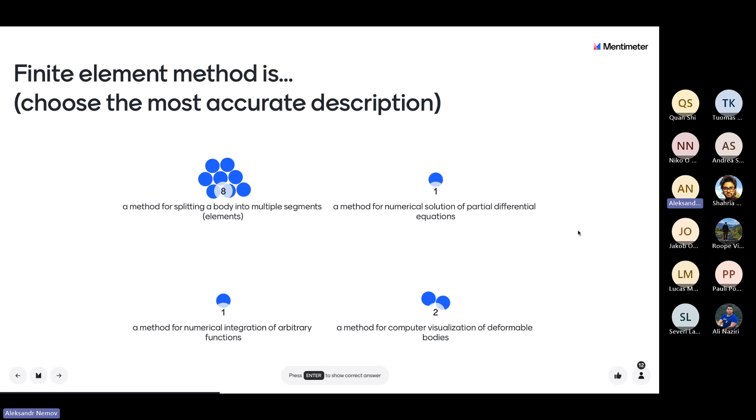So let's discuss. The majority of responses received this method of splitting a body into multiple segments, which are called elements. And I cannot say that it's completely wrong. I will show you the right response, in my opinion, but please take it easy, because I don't imply that it's completely wrong.

That's what I started to say, that it is included in the finite element method. So it's a part of the method, but I would not call it the most accurate description, because it's not about geometry, how to split a body. It's just one part of this method, pretty much a preliminary part, how you prepare. But what the method does itself, it allows you to solve some problems.

So just by splitting a body into segments, you don't really solve any problems. But what you do solve, when you want to find a solution for a problem, you are dealing with partial differential equations, right, as we discussed during the previous class. A lot of things in continuum mechanics can be described using partial differential equations - a lot of them.

And this is one of the most commonly used methods for solving those problems. I will later show that we don't usually solve the partial differential equation directly in finite element method, but that's a little bit later.

So other visualization - yes, it's also always used, like you want to see what is your mesh, what is your discretization, and then you want to see the results, some post-processing things.

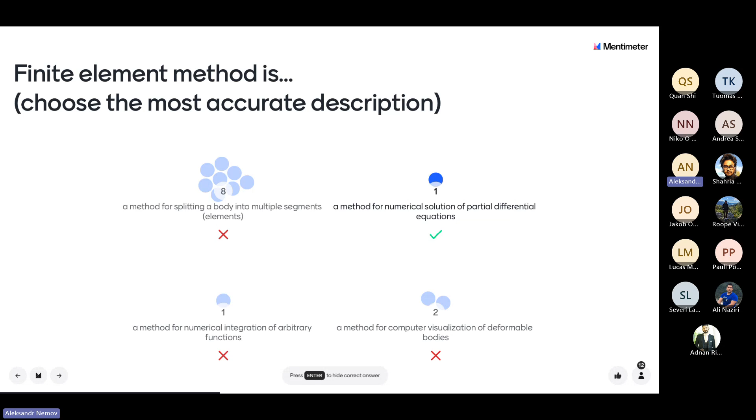Okay, there are not much questions, just a couple more. This one is a little bit more in depth, to dig into your existing knowledge of finite element methods, because many of you, I suppose, have heard about the method and have used it already. Very possible. So this is just to test how deep your knowledge is.

And it's okay if you don't know what shape functions are. For this class, it's completely okay - you are not required to know that. I will explain that today. This is just for me to understand the starting point.

Okay, so I see that people are hesitating, but votes are coming in. Functions for interpolating an unknown value, functions for defining the form factor - and the last two questions, they don't get any votes so far.

I will wait a little bit more for those who want to vote before I show the right response. Okay, I'll assume that we can proceed.

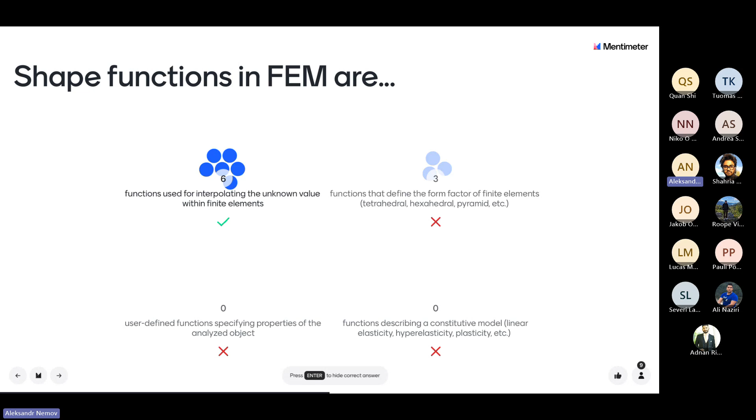And that is described using shape functions. I'll show that later in more detail, but it's good that you already know that. The answer about form factor has to do with shape functions - of course they are affected by this form factor. So a tetrahedral element will have different shape functions than a hexahedral element, for instance, or a plane element. Yes, they will be different. So they are connected - again, it's not completely wrong. I intentionally put it this way so that it's a little bit confusing, but the first answer is the most correct one, and I believe this is one before the last.

Another thing you often hear about in finite element methods is a stiffness matrix. That applies to problems where you solve for stresses or strains in deformable bodies - some kind of mechanical problems where you are looking into deformations. Again, you're not supposed to necessarily know that, but if you do, I would be happy to see that.

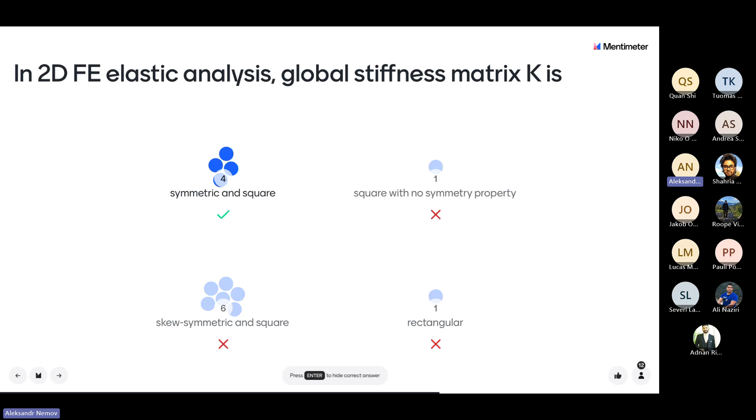So it's typically symmetric - most of you figured out that it's a square matrix, at least for typical problems. And I put in the description that it's two-dimensional and it's elastic analysis, so no multi-physics involved, nothing like that. For this case, it's symmetric - we will see that quite soon. This is something that affects numerical performance quite a lot. If you do a more complicated problem, not just two-dimensional elasticity but something with coupled fields, for instance, then it usually ceases being symmetric, and that affects the numerical performance. So for the same amount of degrees of freedom, you spend much more time finding the solution. People in computational science take advantage of this symmetry quite heavily, and a lot of methods for faster solving of those algebraic equations are based on the assumption that this matrix is symmetric.

So it's good that some of you know that - otherwise we will discuss it later. Well, this is, I believe, the last question in the quiz.

So a little bit about application of the finite element method. Some of you have already used it. And as with boundary value problems, you need to specify boundary conditions. But technically, in finite element software, you are not obliged to do that - you can just leave some parts of a boundary without any boundary conditions specified explicitly.

Okay? And what does that mean mathematically? I think this is the most difficult question in today's quiz. I put here some words describing what kind of problem it is, because what happens at the boundary naturally depends on the problem you are solving. If it's a heat conduction problem, there will be one thing; if it's electromagnetic, it will be another, maybe different things; and if it's elasticity, it will be a third. I put here some more details - I'm not sure if they help you or confuse you. They're supposed to serve both purposes.

The words I put - that it's linear isoparametric hexahedral elements. Oh, sorry, yeah, this is... I started to talk about the next question. Yeah, I'm probably confusing you, but I hope you're reading. So this is about an assumption of how stresses behave. Then the next question - so this is not the last, I thought it was the last, I forgot about this one. So the next will be about boundary conditions, but this one is about stresses. Okay.

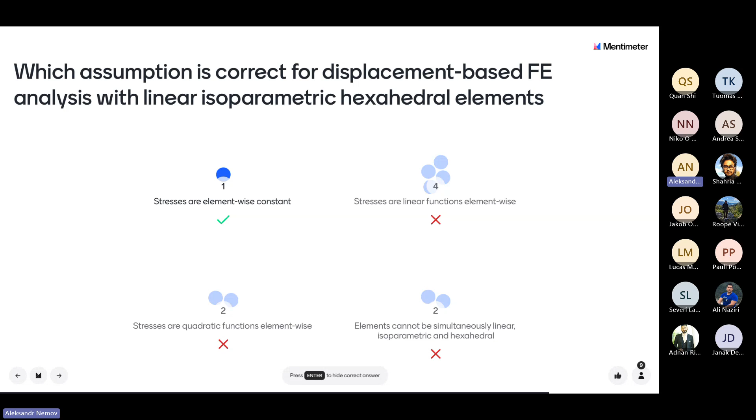I like it that some people chose the last answer, that elements cannot be simultaneously all these things, because people sense that I put some extra words here that are not necessary. No, unfortunately, they can be both, all those things simultaneously. There is no contradiction, but half of those words are really here just to confuse you.

This is the question that I started to describe on the previous slide, and I promise you this is the last one. Let's try to do it quickly.

What happens if we don't prescribe any boundary conditions at some part of the boundary? What does it mean mathematically for the problem we are solving? What will happen on this boundary? Does it imply something or not? I put here quite a lot of different possible responses, starting from the most relaxed one, which is already getting that there are no restrictions at all whatsoever on both displacements and stresses. And different versions saying that something must still be zero.

Okay, 5 people voted. I think it's okay if you don't know and don't want to put an arbitrary vote, it's okay not to vote. But it's interesting to see your opinion, if you do have one. Okay, so very well.

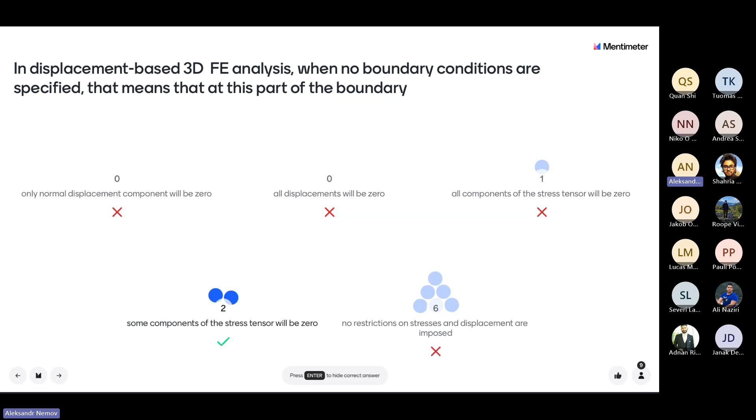If you are solving just partial differential equations on paper analytically, if you don't say anything, you don't say anything. But you cannot solve partial differential equations without providing the necessary amount of boundary conditions, right? Because there are derivatives here, you cannot solve unless you have enough boundary conditions.

But when you are using a variational approach or weak formulation, you can technically not specify boundary conditions, but that means some boundary conditions will still be derived automatically from this variational statement, from the variational principle. Those are the natural boundary conditions, and we are going to talk about them more today. I want you to be aware that there is still something there, and you need to know what it is.

In case of three-dimensional displacement-based elasticity, using at least conventional variational principles—of course you can do something else, but conventionally—it implies that the stress vector will be equal to 0. The stress vector is a dot product of the stress tensor, the Cauchy stress tensor, and the normal vector to this surface, which implies that some components of the stress tensor will be equal to 0. To give more precise information, since saying 'some components' is a bit vague, we need to introduce some directions, referring to the orientation of this boundary or to some reference frame. Mathematically, in three-dimensional analysis, you can say that 3 components of the stress tensor will be equal to 0.

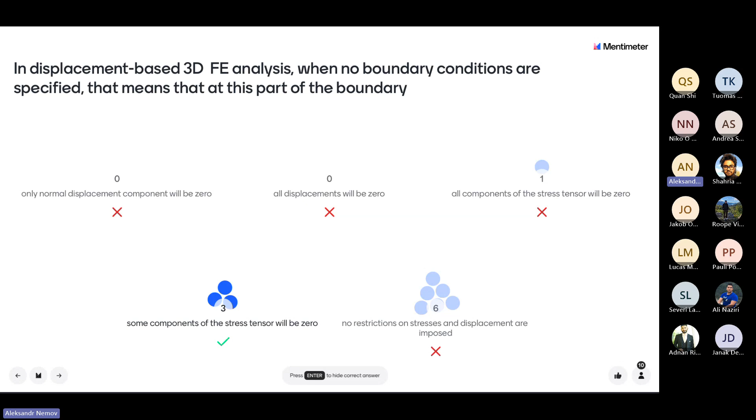Okay, thank you for participating. Let's go into our lecture now. Where is it? It's here.

Okay, so the outline, I think we already mentioned it previous time, so I won't stay for long on this slide. Again, same books that you can refer to, from the great variety of books about finite element methods, this book by Bathe is the most close to what I'm going to show you. This is why I put it here.

Okay, and we will start with discussing what we just mentioned about strong and weak formulations. When you are reading literature about finite element methods, and even documentation to finite element software, you can quite often see these expressions about variational form, variational principle, or weak form of equations. So why do you think we use them at all? Do you think there is any reason?

A bit of a spoiler maybe: in the majority of cases, what you do with finite element method in finite element software is you are solving the governing equations in this weak form, formulated in terms of variational principles with variations. Do you have any thoughts about why we would do that? We have those very nice partial differential equations that we discussed previous time. Why would we need something else?

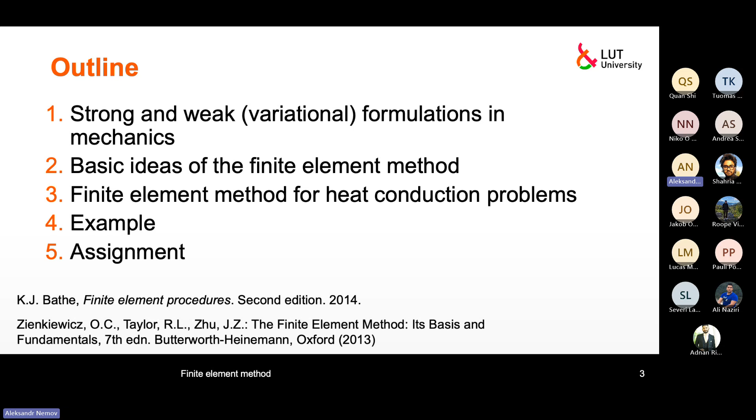Okay, so we will start with a very simple explanation about what this weak formulation is. I tried to explain why we need it. Let's have a look at what it is on an extremely simple problem - the simplest I could come up with - a mass-spring system. One degree of freedom, it's hard to imagine anything simpler in mechanics, right?

So there is a mass supported by a spring in a gravity field, and let's say we want to find the position of this mass. It will go a little bit down, the spring is going to be stretched because of gravity, right? And you can easily solve this, of course. You can write the balance of forces: the elasticity force in the spring, the linear force with respect to displacement, must compensate for the gravity force.

And therefore you just write this solution. Super easy, and well, there are no explicit differential equations here, but this is kind of an analog for this system of the strong formulation.

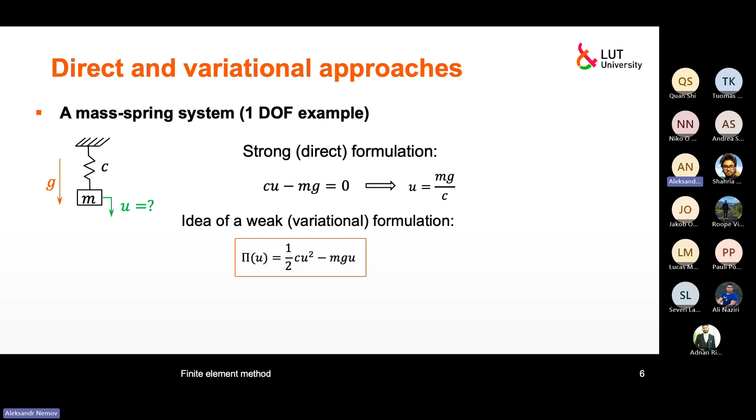So to give you some first idea about what those variational formulations are about, you can think about the principle of minimum potential energy, right? So you can write this form for how to calculate the potential energy of this system for any given position u of this mass - this is school stuff, so you must certainly know that. And then you try to find a displacement u that gives the minimum value to this potential energy.

And you calculate partial derivative. Well, in this case, you have only one variable, so it's the same as full derivative. But you calculate derivative to find extremum of this function, and you find this solution.

Strictly speaking, there is no variational principle yet here because it's super easy. But it's the best analogy in very simple systems that I could think of. And of course, you get the same solution.

But the approaches are different. You notice that in the first, you write balance of forces directly and find your displacement from there. And in the second approach, you are minimizing some form. And this form, in this case, it's potential energy, but it could be something else. Sometimes it's not really possible to give a precise mechanical interpretation of this form. In this case it is, but it's not necessarily the case.

So the second approach is about writing some kind of form for this problem, and then by finding extremum of this form, you find the solution. So it's a fundamentally different approach. We don't use balance of forces here. Of course, it's supposed to give the same results if everything is correct, but it's different.

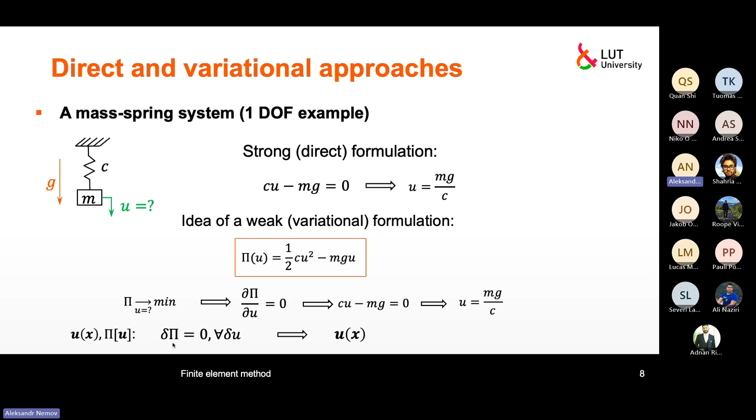Okay, I will show that a bit more general. Starting from this idea, I'm not going to go deep into variational calculus. We don't have time for that at all, but just to let you know a little bit about those things, because this is what finite element method is based on. I don't know, fortunately or unfortunately.

So the general statement of a variational principle is how it is. We have some function u, some unknown function. Function might be a function of coordinates, or a function of time, depending on time, doesn't really matter. And we write a functional or variational form for this function, something that provides a scalar value for any function that we put into it.

Usually it's similar to a function, but it's about a function of a function. Usually a function, you feed it with a value and it gives you another value. That's how single variable functions work. This is a function of a function, so you feed this thing with a function, like I put sine x in as an argument, and it gives me some value, I don't know, 2 or 2.5, whatever. And if I put a different function like cosine instead of sine, it gives me a different value, like 0.2.

Any variational principle can be expressed essentially in this form. We are looking for a function u that provides that this functional has zero first variation for any test function. I use this symbol 'any', which you might know from different calculus courses. This is how it looks like, and a very simple example to have a feeling about this is the principle of minimum energy, for instance.

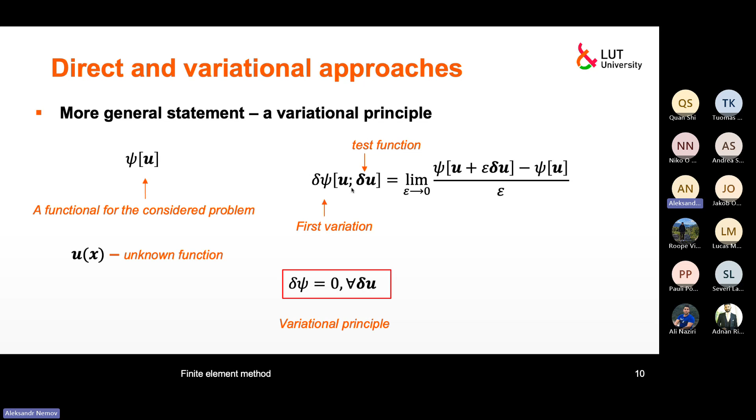And if you calculate this variation from this thing using the definition on the previous slide, or just using analogy with differential calculus, because it's essentially the same mathematically, you can use pretty much all the same tricks as with normal differentiation, but keeping in mind that you are now talking about functions and not variables as arguments. There is a lot of analogy between differential calculus and variational calculus, but of course you need some practice with it. This is not the topic of our lecture, but there are plenty of books that give examples and provide tools, theorems to do those things.

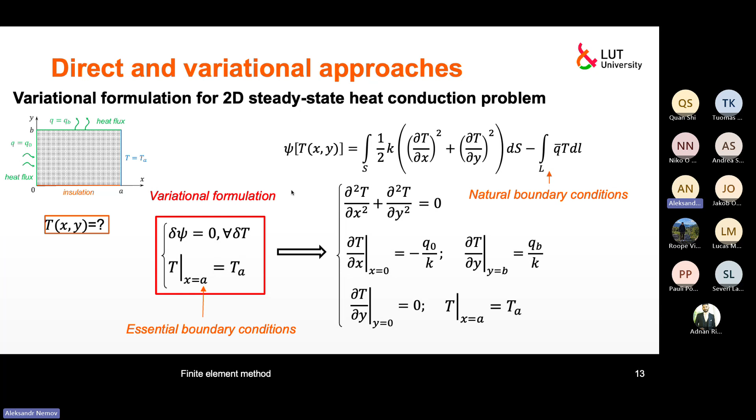Okay, so that's basically what I wanted to talk about. Yes, it's...

Okay, I will not say exactly like you put it. I would say it's called weak because if you look at this, this is our differential statement. This is strong formulation, and it's strong because you have second derivatives here, so the solution you are looking for must be continuous enough for the second derivatives to exist.

But this thing only has first derivatives, if you pay attention here. I didn't explain how to get it, but if you look at it, you see it has only first derivatives. So with this formulation and numerical methods, you can find a solution that does not, strictly speaking, satisfy the strong statement, because those second derivatives might be infinite. So there are relaxed requirements with respect to continuity of your function, and this is why it's called weak, I think.

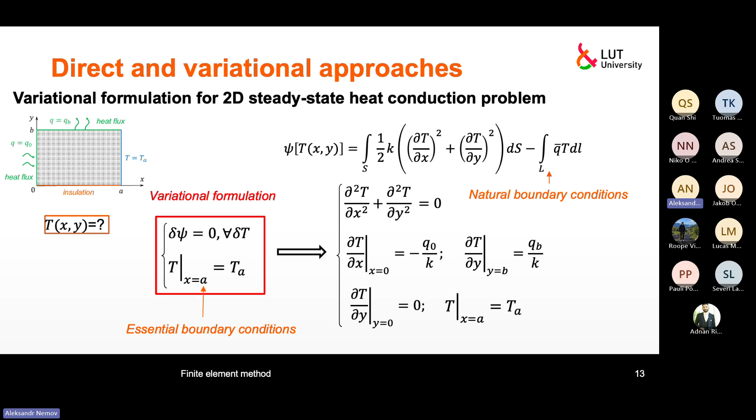Let's talk about the finite element method and try to justify answers to the quiz questions that we had. First, I will start with discretization, and this is one of the responses that was shown as not correct, but it's not entirely incorrect. It's just not the essence of the method, but it is a part of it.

And those elements might have different shapes, of course. So in a two-dimensional perspective, you might want to discretize your object with triangle elements, linear triangular, or non-linear triangular with quadratic faces. Or you might want quadrilateral elements with linear sides or non-linear, quadratic, sides. Those are all elements that you might see.

If you go into other dimensions, starting from one-dimensional problems, there isn't that great a variety. It only depends on geometry, but since it's just one dimension, we can still approximate our body with linear segments, a line. Let's say there is some three-dimensional line; we can approximate it with linear segments, or with quadratic segments, or we can use higher order splines to approximate it.

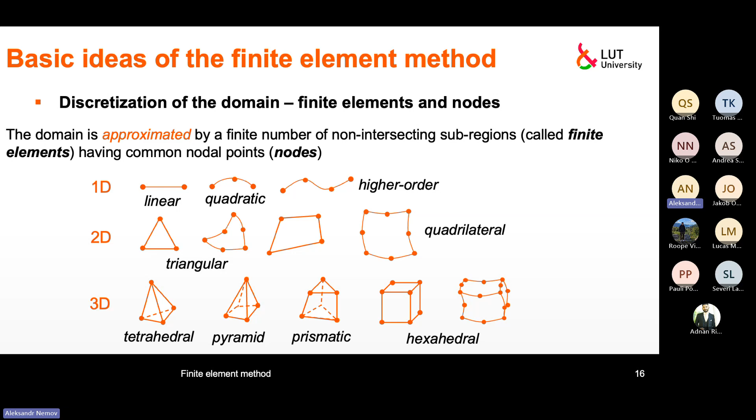Okay, this is what you are going to see in finite element software. So what does it have to do with our differential equation or with our variational forms?

First thing you must be aware of is this transition between local and global coordinates. Let's say we have a quadrilateral element in two dimensions with four nodes, a linear element. Those four nodes have coordinates in our global coordinate frame, and we would like to make a transition to local coordinates, which always take values from -1 to 1 from node to node. So this left bottom node is -1, -1 in terms of eta and xi, this is 1, -1, and so on.

Mathematically, we can establish a correspondence between those two using the Jacobian matrix, which consists of partial derivatives of one set of coordinates with respect to another. Nothing new here, but we need to be aware of it, because we will formulate everything internally in terms of local coordinates. But then to fulfill the overall equations, we will have to switch back to global coordinates.

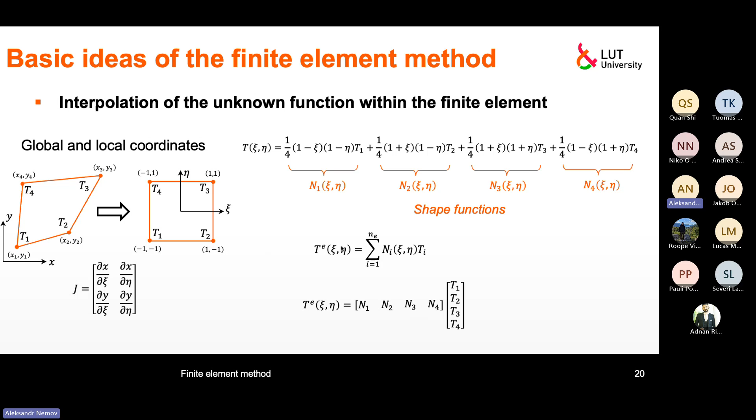Now I have to get a little more technical. I write this interpolation in shorter form using summation notation, and finally matrix notation. N1, N2, N3, and N4 are these shape functions, so I make a row matrix out of those functions, and a column of nodal values of temperature at the nodes of my element. Then the product of this row vector and column vector gives exactly this approximation. This is the essence of the finite element method, how we approximate an unknown function within an element, described using shape functions.

Okay, so we need all that to eventually solve this heat conduction problem using, as I mentioned, this variational form. We will apply this finite element discretization to this variational form, and we will assume that we can find the total value of this functional by summation of contributions for each element. This is true in most cases, and in this particular case it is certainly true.

Inside this variational form, we have this sum of first order derivatives with respect to x and y, each of them to the power 2. So we are going to need to calculate this thing using our approximation, so we need to calculate those derivatives. This is our approximation, and this is the basic assumption that the total thing, which is energy by the way.

This total energy doesn't have to be in every variational principle, but in this case it is. The total energy is a sum of energies for each element. Within each element, we can use this approximation of temperature using shape functions, as we showed previously. And then we want to calculate derivatives.

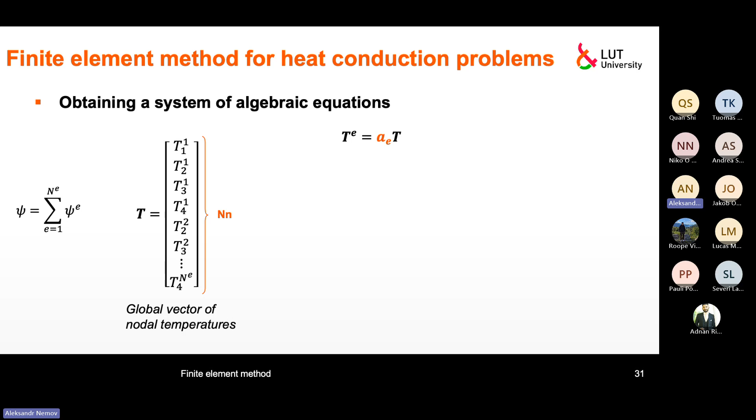I didn't get into this right now. We will get into that in our example, but to answer your question, basically when you are calculating these integrals, this is where you should do that. This kind of integrals, when you're calculating them, we will be doing that.

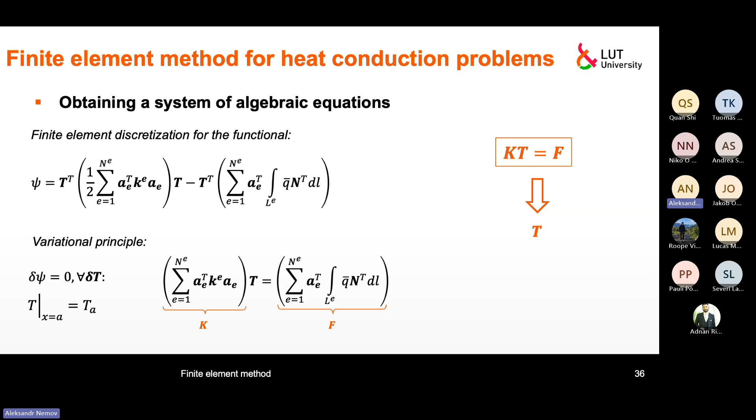I understand that it's maybe a little bit messy because it's not so trivial stuff if you haven't dealt with it earlier. Maybe it's not very trivial, but as usual it's easier to grasp the idea when you're dealing with an example, and this is exactly what we are going to do in the remaining part of our lecture.

Let me start explaining the example, then we maybe make a short break if you want to, and then we start trying to code this thing and solve it numerically - exactly this heat propagation, heat conduction problem.

So we have our domain, prescribed temperature 0 at one side, insulation which means 0 heat flux on another side, and prescribed heat flux values at 2 remaining sides.

We will be using these simple rectangular elements for this example to make it simpler, and then we will compose the nodal vector of temperature values for 4 elements, and compose the vector of all nodal temperatures, and then we will try to solve this problem.